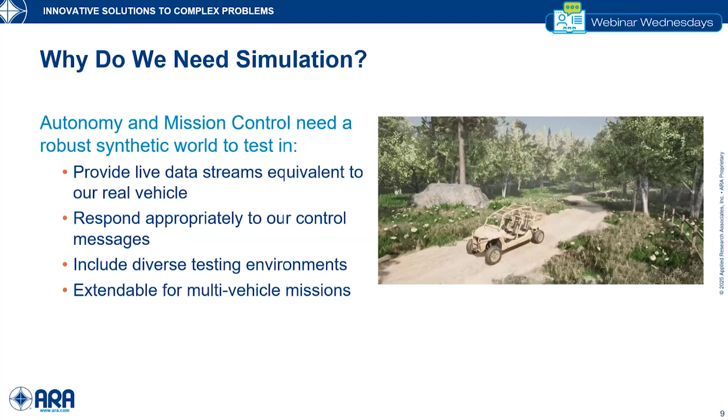We can start to look into what our simulation provides. The biggest one we've been talking about is that it needs to be a development tool. This needs to be something made for users. By providing users with a real-time simulation that gives them interfaces identical to the real vehicle, they can launch their code with the assurance that they will see the same behavior if they actually go out and do the same thing on a real vehicle.

Very often, simulations like this can be extremely expensive resource-wise, which ends up making them very difficult to use. So for us, it's critical that any developer at any time could very quickly launch VISE alongside the systems they need to test, on their own personal development setup, somewhere they're comfortable developing, and have access to all the tools they would need to appropriately test it.

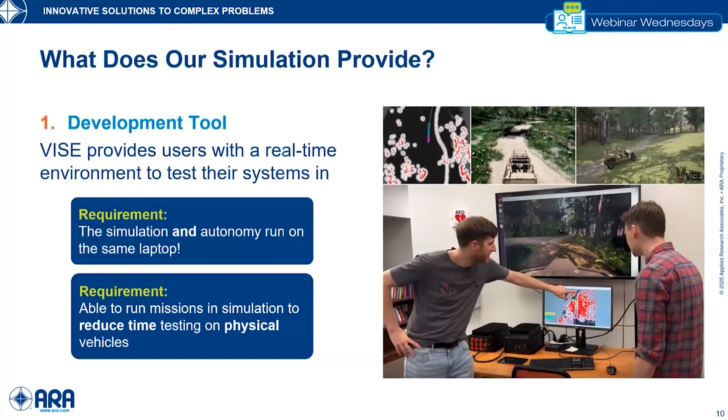Additionally, the ease of use for running missions is a big one too. We want VISE to be configurable so that you can either replicate missions that you would run in the real world, or construct missions from the ground up that may test certain cases. This brings us to the next slide, where we'll take a more in-depth look at the edge cases themselves.

Since we are in a simulation, we have access to running tests that would either be unlikely or just plain dangerous to do in the real world. But it might still be something we would want to see our system respond to.

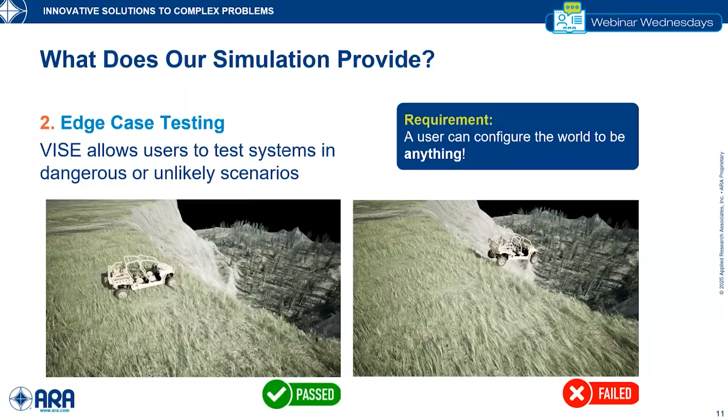Additionally, due to the way VISE works, we can configure pretty much any kind of test, and we're going to talk about this a lot more in detail later. But first, if you can move on to the next slide...

The last thing I want to talk about that VISE provides, or the simulation provides, is that it can generate synthetic data for training and evaluating AI. This is a very big thing now. Since we have full knowledge of the simulation's internal state, we can acquire the ground truth for anything, whether that be the odometry or position of a testing platform, or just getting fully classified sensor outputs.

And with all of those types of data, in order to be able to generate the sheer amount of it needed to actually train systems, we have the ability to run faster than real time. Now this can either be locally based on a setup, or we can distribute the system across many GPUs and parallelize the process.

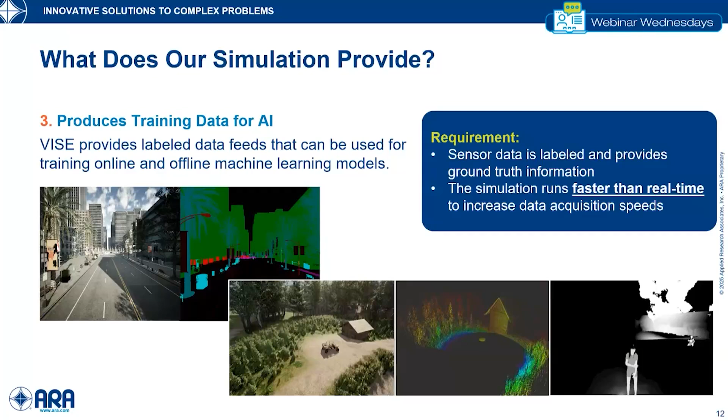These inputs go into the simulated vehicle, and the simulation then processes the movement that would have happened due to that throttle or steer change. This changes the sensor's output, which the autonomy sees as a difference, and it continues this cycle.

Over many time steps, the vehicle will end up moving around the simulated environment as the autonomy makes new decisions and sees new things. It's very much a digital twin of what you would see in the real world when you do this on a physical vehicle.

An important concept here is that these clocks are fully synchronized. The autonomy needs to be running at the same rate as the simulation to best align with what the real world would look like. If the autonomy starts running faster, or the simulation runs faster than the autonomy, you can desync between the two.

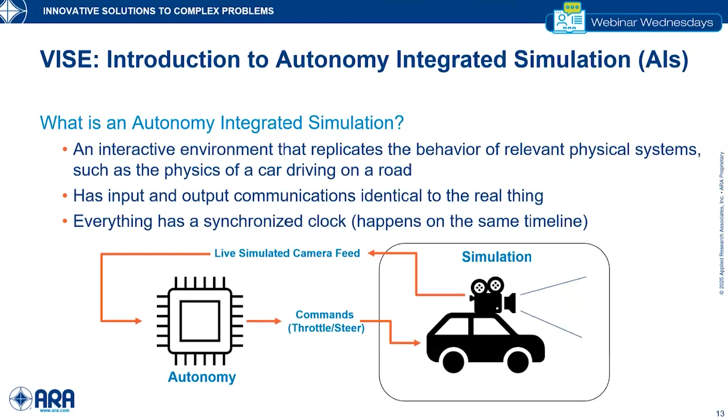And this whole statement is loaded with all of the information that we just went over. Everything of what we just talked about, this is what that means.

This simulation is very feature-rich, and it allows a user to configure every aspect of its world, from changing the weather to modifying obstacles in the environment, the sensors on the vehicle and where they are and their internal parameters, and even the terrain itself. All of this can be modified at runtime whenever we want. You don't need to turn the simulation off and back on to change things. You could do it while it's running.

It is also something we call autonomy ready, in that it's been optimized for integrating autonomous systems with, and that is something we've already done across many different stacks, DoD, commercial, and open source, made possible by the many different communication channels we have to accommodate this.

As I mentioned earlier, we need to be able to create the same interface that a vehicle would provide, predominantly in the space we're in, the robotic space. This is with ROS1 and ROS2, the robotic operating system. But we also support socket communications as well, which can be pretty common with sensors or lower level control on a lot of the ground vehicles that we work with.

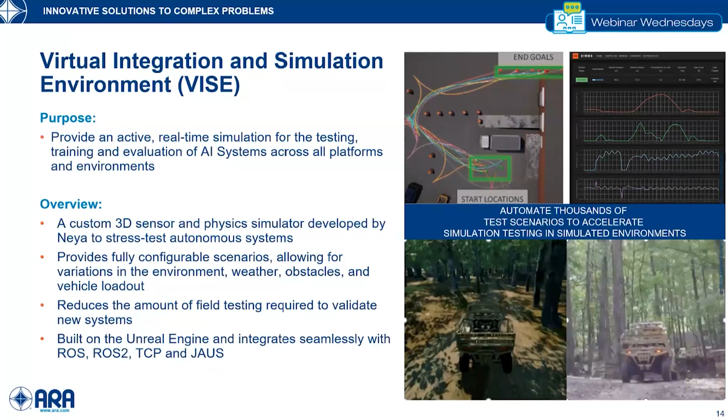Additionally, due to the way that VISE is built, it's all very highly modular and extendable, so many more communication types could be integrated with it as is. On the next slide, we show an array of different features we've created.

Since VISE is built on the Unreal Engine, we have access to many open source tools, as mentioned before, Carla, but there are others as well that we have access to. Pretty much anything built in the Unreal Engine could be leveraged in VISE. Unreal is a modern gaming engine that gives us full control to use built-in physics that it gives us, or leverage our own custom physics to perform pretty much anything we want.

By leveraging all of this modern gaming functionality, we can very rapidly generate new environments, vehicles, or features. In that workspace, we can also work with systems that are in any environment, land, air, sea, any type, and with any type of function or mission.

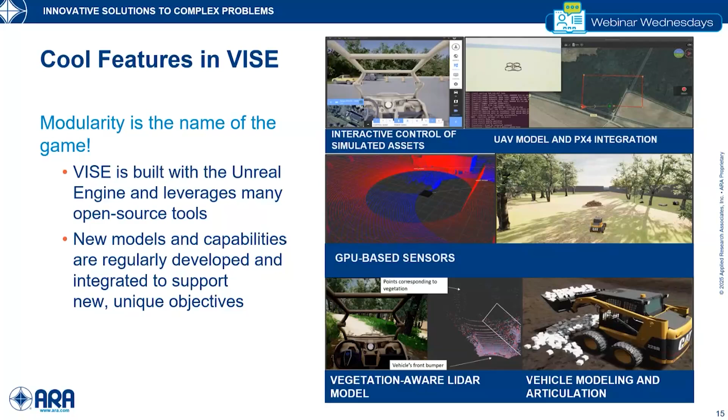We can generate the terrain and the features on that terrain. This includes vegetation, roads, buildings, and so on, pretty much everything you'd see when you actually go out and run tests. Then, after it generates it, we can immediately deploy autonomous vehicles, like the MRZR we showed, or any of the other vehicles we have, in that environment. So, with this tool, our users can deploy anytime, anywhere.

A fun benefit of how we made this tool is that it can also generate things that aren't real, which sounds funny at first. But take, for example, if I'm trying to set up an autonomy system, and I just want to test my autonomy in a pretty straightforward situation, maybe a mostly flat world with some randomized rocks and maybe some randomized bushes. I want to make sure that if I run that test over and over again, maybe across a Monte Carlo style testing setup, it's always successful - I can always drive through that kind of simple environment.

The agnostic input data for this tool allows us to generate millions of seeded iterations of that test.

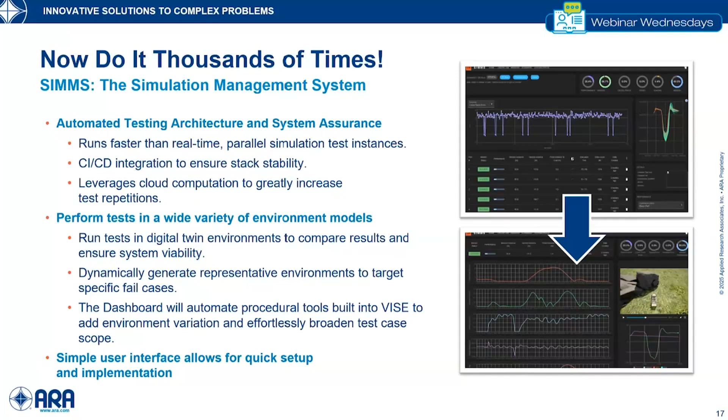I'm going to talk about our mission planning and management system, and jump right into a slide I like to present all the time on what is mission planning and how do we define that. That's really important in robotics because the words mission planning are overloaded a lot - sometimes it's single vehicle path planning, sometimes it's minor coordination. For our system, the MPMS system, we look at it as the highest level of mission planning.

So how can we do what a lot of people might term fleet management or coordination and tasking of large numbers of systems that are completely heterogeneous and disparate, might be manned, might be unmanned. So what does MPMS actually provide? It coordinates existing behaviors within all of these systems to work together to perform missions and tasks.

It's fully distributed and vehicle agnostic. I'll talk a little bit about how everything's implemented in a few slides, but basically we are completely agnostic to the actual vehicle type when we're designing and running a task, and there's an integration an engineer does on a vehicle. We have high-level scheduling and asset assignment.

If I have 50 assets and I have a mission and I want to know what the best assets to perform that mission are, I can select and it will suggest assets. And then lastly, and more common now, is if you're going to control multiple systems, there is a large aspect of user interface and cognitive load and cognitive science involved in what data needs to be presented to be able to understand what's happening when you're looking at a map with 15 or 20 systems performing a mission.

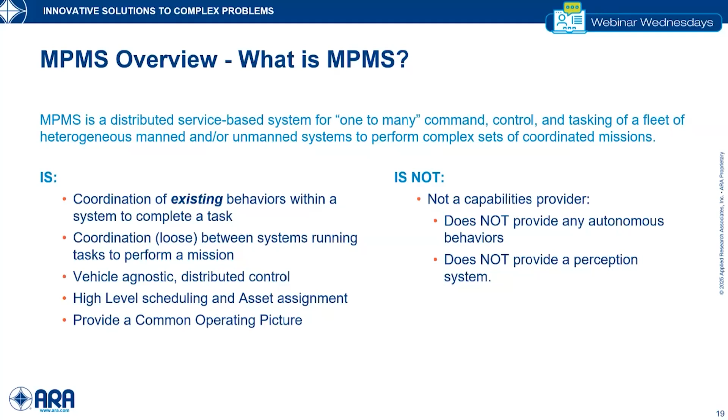And now jumping into why MPMS and a little bit of the history of MPMS. So MPMS was actually ARA's very first Department of Defense SBIR in 2011, I believe. Since then, it's been funded by many different agencies, many different domains, over $19 million invested over about 15 years. We've integrated many systems from small ground robots, PackBots, Talons, all the way up to a full-size KMAX helicopter for CASEVAC missions.

We've performed many operational field experiments. Early on, that was a lot of simulation and testing. But lately, we've performed missions with actual soldiers executing with MPMS to perform real-world relevant missions. The last one was last year for the 10X event - a RAS platoon at Fort Benning, executing a 2.5-kilometer move to contact, followed by a hasty attack, hasty defense, and a consolidation and reorganization mission, controlling 9 different systems: 3 unmanned ground tracked vehicles, 3 quadrupeds, and 3 UAV drone vehicles. All controlled and executed from a single controller, which the platoon leader had.

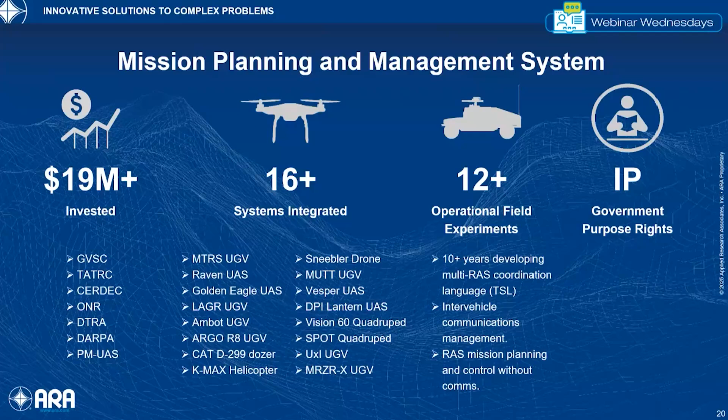So now I'm going to jump right into the how. How does MPMS actually function? What's the high-level architecture look like? How do we do what we're doing?

So when we first started out, the real definition of mission planning was, how are we going to go from one-to-one control, or even many-to-one control, which is what we had in the 2011 range. You had PackBots, Talons, EOD robotics, where you have a controller. Even drones, class 2 and above, then you've got a huge command station, might be 4 or 5 people actually involved in controlling one single vehicle.

So the question from that point was, how do we go from that to a one-to-many, a true one-to-many control? How can one person actually command and control many robots? To do that, we first separated the concept of control and this high-level control into 4 main components.

On the top left, we have our mission planning tools. We call this kind of a priori mission planning. We realized early on we want to let people who aren't software engineers be able to create new missions and tasks. That's a really important feature, because if you have a new mission type come up, or want to integrate a new mission type, you don't want to spend $500,000 on a software engineer. You just hand it to someone and say, write a new mission for this and go test it out. So that's all done a priori, offline.

And then the outputs of that get loaded into what we call the operational missions, which is separated into 3 pieces. So we have the operator user experience here. Right now, that's mostly integrated with the ATAK platform. We have an ATAK plugin that allows the user to create missions, assign missions, set features, draw search areas, things like that. But it's a distributed system.

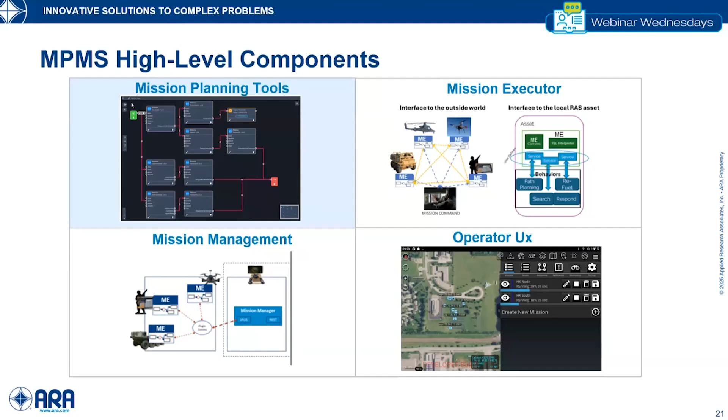So then to jump down into the actual systems architecture and software architecture and what that looks like - from left to right, you've got vehicles up to controller. You've got MEs representing a vehicle. They can represent a manned system, an unmanned system, any asset, any capability that executes in the real world. We've integrated with the SMET platforms, quadrupeds, drones. As far as the system's concerned, an asset is just something that can run behaviors.

Then there's comms. Internally in MPMS, we have a messaging and a comms system, and message types that are all defined as JSON schemas. It's obviously open - that's just the way we do things. But the actual protocol and transport layer is independent.

We have a plug-in system. You can replace the comms with whatever you want, because we know that we're not radio designers, and radios change, protocols change, transport changes, so it can be integrated with anything. And then when you go towards the right, you see you've got these services that reside and can be accessed through REST interfaces to any user interface.

So we look at user interfaces mostly as presentation layers and not as executing algorithmic mission planning. So the views that you see in ATAC or Web UI or WMI or any of our presentation layers are actually just representations of the current state of the system, as well as allowing you to change that state. It's not necessarily internally inside that ATAC UI plugin going to be executing or doing any kinds of mission planning algorithms. Those reside on services separately.

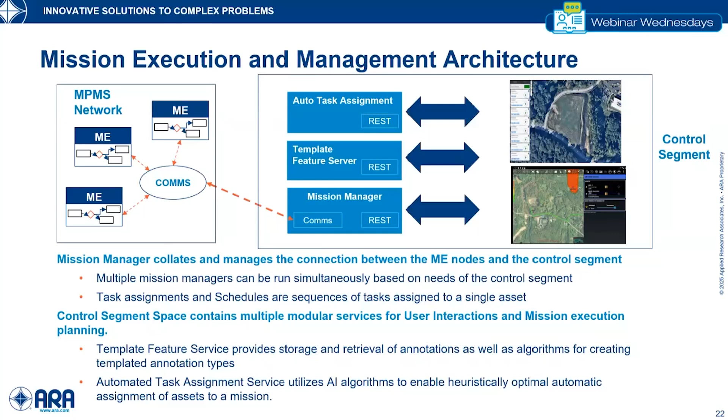One of the core unique things about MPMS is our mission planning tooling and how we do and look at planning. We call this Plan T or Plant. And what this tool provides is a graphical representation of a task that's going to be performed on a system.

So the core concept behind MPMS here is that an individual asset is going to run a task. And that task is a loosely coupled thing with other tasks that are running at the same time. But on a single asset, an asset defines behaviors. And what we define as a behavior is just an abstract interface to something.

So one of the behaviors we define, for instance, is called traverse to. And what that abstract interface is, it takes in a list of waypoints. It has some configuration values of like what speed or altitude or whatever you want to fly or drive. And it outputs when that list of waypoints has been finished executing.

That's the entire behavior. So when you integrate on a vehicle, MPMS doesn't care how that behavior is executed. It doesn't care if it's using NEYA's N-Drive system on a ground vehicle or if it's using PX4 on an air vehicle. That behavior is just signal comes in with waypoint list, signal goes out with waypoint list has been executed successfully. Some of the other behaviors that we've implemented on here, if you look at this graph here, you've got at start, it executes a traverse to behavior, followed by 2 comms and battery monitor behaviors.

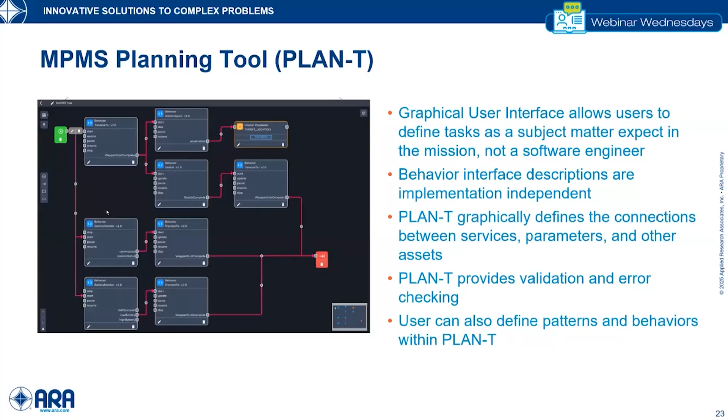So that's the mission planning side, and we've trained soldiers for that 10X operation to actually use that system and create the missions hands off by us for all of the missions that we executed for 10X.

So then on the back end side, how do we actually integrate to vehicles? We have what we call mission executors, and these take the machine readable format and execute it, interpret it, and execute all of those behaviors correctly. So really what an ME is taking, it's taking those behavior interfaces and integrating them into the actual autonomous systems of that particular platform.

For instance, we have an ME for our MRaiser Alpha platform that you saw in the sim before. We have MEs for PX4 drones. We have MEs for simulated generic vehicles. A particular vehicle type will have a particular ME node.

What we can do is we have an SDK that we can hand to third parties and say, you don't need to know anything about MPMS, you just need to use this SDK. Here's some defined behaviors, run the code generation, fill in here for when signal comes in, fill in here for when signal comes out. Okay, now your behavior is integrated, and I can now run any task that has those behaviors in it for your system.

And we've actually done this with several third parties over the last few years. We've handed it off, we have no knowledge of those vehicle interfaces, they're not done by us. People were capable of creating other ME nodes that we actually have executed.

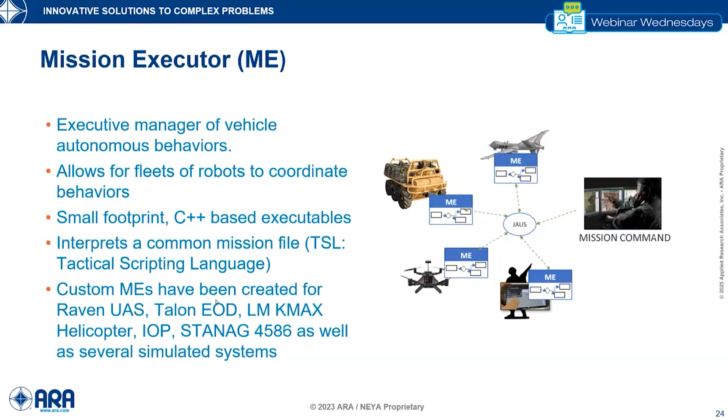Back to why: when we started this in 2011, there were not a lot of robots available. They're super expensive, and the chances of a squad, a platoon, even a company having even one robot was pretty slim. But we knew that was going to change, and that's obviously drastically changing now.

And there is a distinct need for a single command and control of multiple heterogeneous platforms. It can't be a fixed thing that costs a lot of money to do new integration. That's really what this is. We're going to be seeing more and more systems being implemented and integrated and deployed, and to control those systems together, we need an architecture that allows that. That's the distributed nature of the architecture—the pieces can be used in other systems.

We've integrated with various other architecture platforms, from Lockheed's RailSA to WMI and GVSC. It's designed for integration with deployed systems. It's completely system agnostic. We need to bring new systems in, it's super easy. And more importantly, reducing cost, right? GPR licensing, that's a big deal.

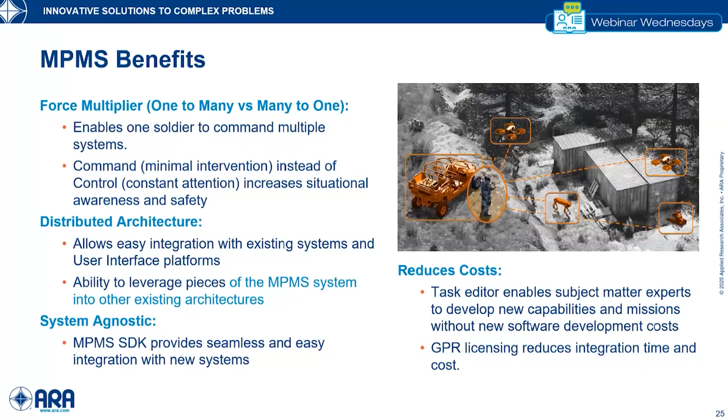But also the task editor is worth putting into the hands of people that are actually experts in the missions being run, the ability to create those missions and design them. So instead of the current paradigm, where I bring in a subject matter expert, they tell me what missions are, and as a software engineer I create those missions in a system as runnable - well, we're just saying, okay, a system is made up of behaviors. You can connect those behaviors however you want, and connect those systems together however you want using this system. That reduces hugely development costs, but also time. If you can come up with a new way to integrate behaviors and systems, you can try it out and run it.

Which brings us right to, hey, how are we going to use MPMS and VISE together to benefit us? And what problems does this actually solve? It solves the problem I just said - we want to be able to hand these systems to people to test, to verify. For MPMS, it's hugely time intensive to actually go test with real systems.

Robert mentioned earlier how long it takes to test with a single system and a single platform. Now, it's not like if you add 1 or 2, you're multiplying the time by 2 - it's exponentially more difficult. You need a larger area, you need more people. If you're flying, there are requirements for safety. And you need network - large network, extensive radios, which are very expensive.

But if you want to test a new mission, if you want to test a new type of mission, if you want to test a new integrated vehicle, you really need to test it somehow, right? We're all developers. And it needs to be done.

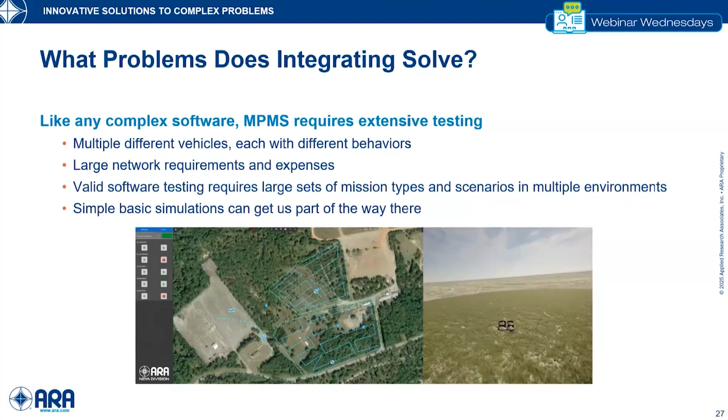And so what we created for MPMS initially, what we have are some really basic simulations that aren't part of VISE that provide just interface testing. So if I want to test whether a system is going to be able to handle a behavior, or whether a behavior makes sense, we can do that in a basic simulation. But it doesn't provide the fidelity and the kind of capabilities that are needed to do a true test.

We need to be able to test real vehicles in real scenarios. And I've been doing this a long time - it is prohibitively expensive to do that with real robots. The robots themselves can cost, just physically acquiring them, millions of dollars, if you're talking about 5, 10, 15 robots. And then just the logistics and management of actually executing a single test with 10 or 15 robots is prohibitively expensive and time consuming.

For several of these events that we've done with real robots, we did a lot of simulation early on, and that helps. Then you get in the real world, and sometimes you get 1, 2, maybe 3 runs of testing a day. That's obviously not enough. And more importantly, it exponentially increases the time every vehicle you add. It is very, very, very expensive.

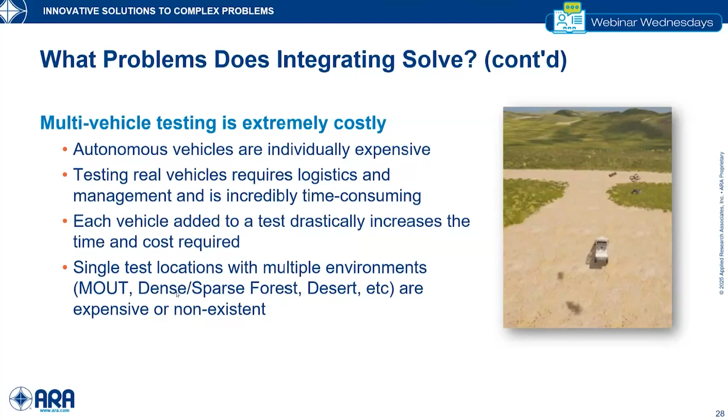So what did we do? How do we do that? Well, MPMS is the top end. It's controlling and managing all these vehicles at the top end, and it doesn't know that we're running VISE on the back end. Because as Robert said, if you're running a sim, you don't want to have special setup and special integration. So VISE actually does allow us to create and set up environments with 5, 10 vehicles and run missions, and MPMS doesn't care that it's VISE or even know. In between, we could run end-drive autonomy, or just basic whatever comes with ROS now. And it's allowed us to actually do a lot of different unique testing, even for some potential commercial applications like mining or digging.

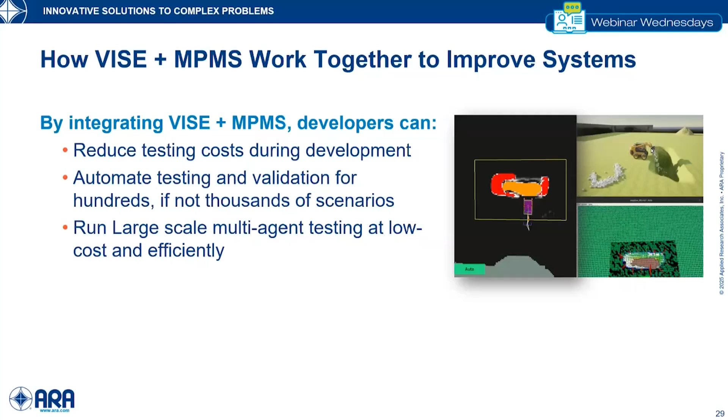When we train soldiers or users, you don't want to do training with real systems—once again, super expensive. Also very uncomfortable to be outside in the heat potentially. But you can execute and train users how to create missions, how to run missions, how to execute the system before you get out in the field and you're spending $100,000 a day.

They can refine tactics. They can rapidly change integration with AI. And they can do this with VISE and MPMS without engineers sitting behind them. These are tools, you take them, they're running, and you just start using them.

So just to sum up everything we talked about: the integration between VISE and MPMS is a big deal for us, but it's also just a big deal in general—it's the whole entire system. You can plug in autonomy and stuff in the middle, but VISE gives you all the capabilities to run lots of different missions, lots of different locations, and MPMS is the top end. It's saying I can actually control and command and understand what's happening between 10, 15, 20, 30, 40, 100 systems.

Government purpose rights—VISE and MPMS are both government purpose rights. This supports our goal of making these systems deployed, being used, saving lives, helping execute missions, and allowing the government to use them without vendor lock. We update them, we manage them. It doesn't change commercial licensing, obviously, but we feel as good stewards of the government's money that this is actually the correct way to go.